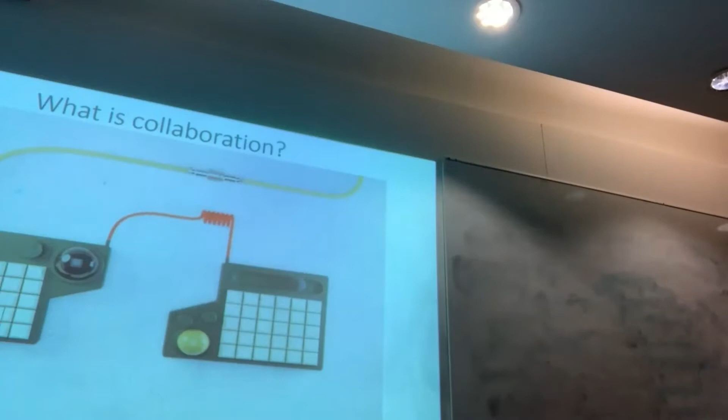It's a real pleasure to speak about collaboration. Today the topic is architects and engineers, or engineers and architects, collaborating together. Steve and I, I'm an architect, I'll introduce myself in a minute. We had collaborated for a period of 5 years, 20-ish years ago. It's not as long ago as it seems. In 20 years' time, this will seem like the shortest trip.

What we'd like to talk about today is the nature of collaboration today. I'm really interested in how collaboration has come to the forefront of working together. It is the mainstream. It is for your generation. You will know nothing but collaboration. Part of what we're going to discuss today, my little bit, is going to be what collaboration is not.

So this is my introduction. I'm a trained architect. I'm from the US. I was educated in New York, practiced in New York for 10 years before moving to Paris, practiced in Paris for 4 years before moving to the UK, where I have been living and working for 24 years. I had been working with very large practices up until the last 6 years, where I established my own practice with my partner, daab Design. We are a small practice, and we do works on small and large scale, micro to the macro.

My experience from 1984 to 2015 was with very large practices working on large infrastructure projects where collaboration was introduced to the profession at the time. So that's my share.

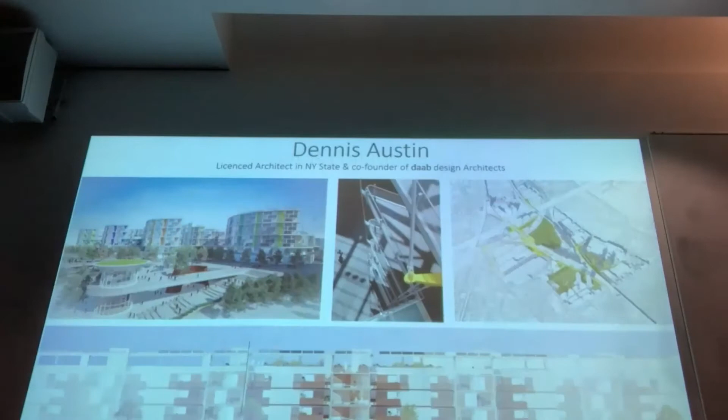For me to discuss what collaboration is, it's important to discuss what collaboration is not. A lot of buzzwords going around now. Collaboration is not just good coordination. Collaboration is not the traditional design team where there's an architect, a services engineer, structures engineer, sustainability, and a series of consultants. That's how projects have been structured for very long periods of time. Collaboration is not just, oh, we get along really well with our engineers, or the engineers saying those architects really aren't such jerks after all.

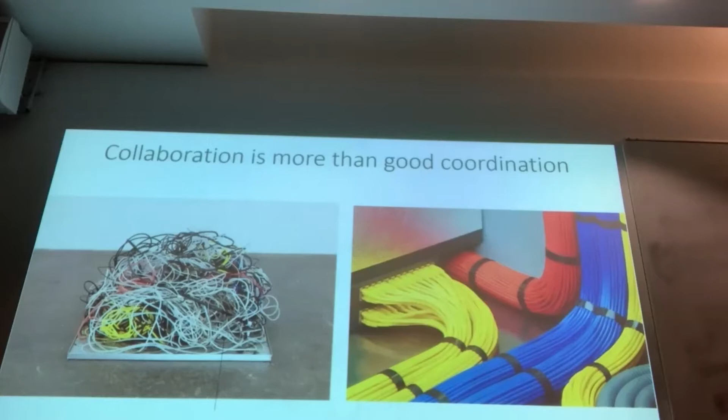Everyone had a task, and you sort of participated. You plugged in your task. You were never driven by the overall picture. You were never driven by what am I actually contributing. You were incredibly faithful to what you were delivering. You were faithful to the hierarchy of the project, of the office, of the structure.

And what happened, especially in the UK, so this is great because I'm not from the UK, I'm going to tell you about the UK history. What happened in the UK after the Second World War was a rethinking of industry. Some of it was just by sheer necessity: how to take a wartime industry and readapt it to post-war. It was also looking at how do we source raw materials, how do we upgrade our manufacturing infrastructure. It also looked at how do we begin to understand the needs of the customer.

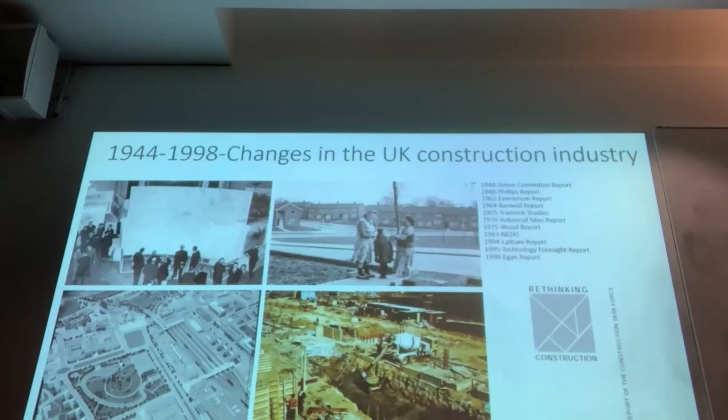1998 is when I joined Terminal 5. Steve joined a year or two later. Terminal 5, which we'll get to a bit later, is the epitome of this sort of Egan ethos. It's what has driven UK industry since. Crossrail, Jubilee Line Extension, Olympics, Vauxhall Nine Elms, Battersea Power Station. There's not a single project in the UK that has not been affected by this way of working, which is about collaboration.

So why do they collaborate? Why do I collaborate? I first want to talk for a moment about why I do this job at all, and that's because I really like making things. It is the feeling that you get when you see something that you have imagined with your collaborators and thought about and designed and analysed, and somebody builds that and it becomes real. That is almost the best feeling. And that is very much why I work in engineering design. It's not for the money or for the fame.

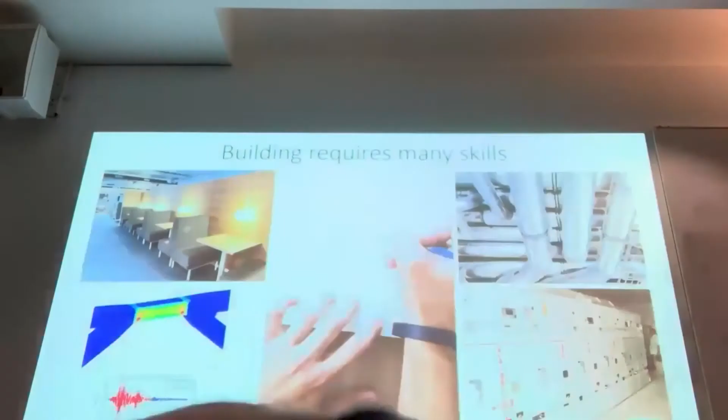And in order to do that, you have to collaborate. At the very basic level, like Dennis said, you have to collaborate because it is not possible for one person or even one artificial intelligence system to have all the knowledge and skill that's required to design all the multiple different facets of a building, its technical aspects, its human aspects, the beauty, the feeling of what a space is and what it can be. So you require a large number of people to do the job, but that is not enough on its own. Collaboration, as we talked about, requires much more than that.

It requires that the people involved can listen to each other and include each other. All the people with the right skills are working towards common goals, and they may well need patience with each other in order to understand and learn, and they need curiosity. A growth mindset is a thing that I learned about from schools quite recently, but I think that's a really important concept.

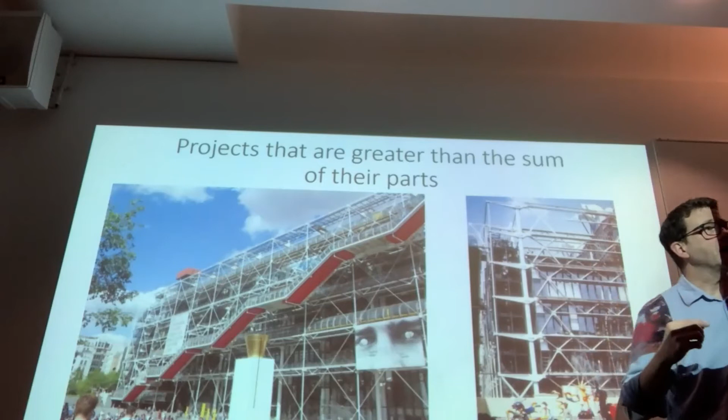And when I was trying to think of a building that epitomized that, I thought of a building in Beaubourg where the structure is a key part of the architecture, and the architecture is a key part of the structure, and the MEP systems and the vertical circulation are a key part of all of that. And it's a special solution that has come together from minds working together and thinking about every detail as well, from the most overall view of the building down to what the texture of the steel is when you walk up to it and touch it. It's a very special thing.

So this photograph, this is the Centre Pompidou in Paris, 1973 to 1977, is the epitome of collaboration. This is almost 20 years before the Egan report. What it is, it's mutual respect. It's services engineers sitting around, and back then, and even today on many projects, a services engineer, perhaps for the first time, hearing an architect saying, can you explain why the ducts need to be here? If they're coming from this mechanical room and they're branching out, can we organize them in a certain way?

And the services engineer would say, why don't you have a ceiling? No, we don't have a ceiling, we'd like to see that. Why do you want to see it? Because we think there's something. And what happens is, it becomes this thread that you pull. You're showing a level of curiosity for the non-services engineer, so for the architect. And the services engineer is saying, great, it's the first time someone's really interested in what I do. This building epitomizes that, and that's the beginning of collaboration.

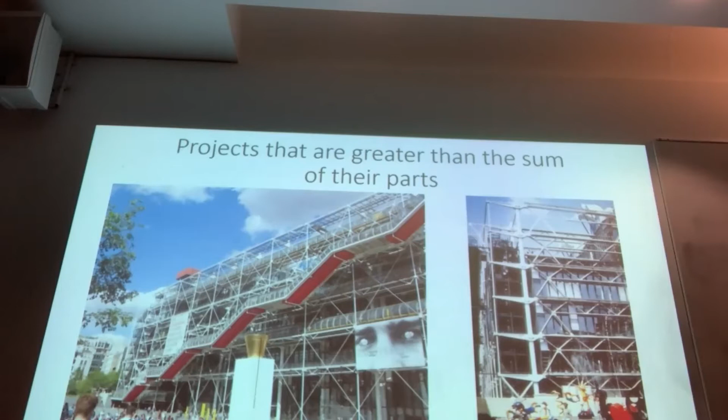Yes, and I've sort of put my tongue slightly in cheek when I said that what you can create at the end of it is a part of the legacy of humankind. And I think Terminal 5 that we worked on does come to that. I also think that the house I live in at the moment, where I'm repairing it, counts as part of the legacy of humankind as well, because it's been there for years, and I'm going to pass it on to the next people. But I count my work, our work, as something that is for the future.

Yeah. And what's happening at this meeting is a discussion where the engineer is putting the architect to task. If this is what we really want to do, we're going to have to do the following. And then the architect said, well, if we have to do the following, can't we understand how this might be expressed? That's an interesting idea. If we express that, then the load path is changed. However, what you've suggested is an improvement to the load path, by the way. And it is a fluid, open discussion. And what it then does is it begins to set a mindset.

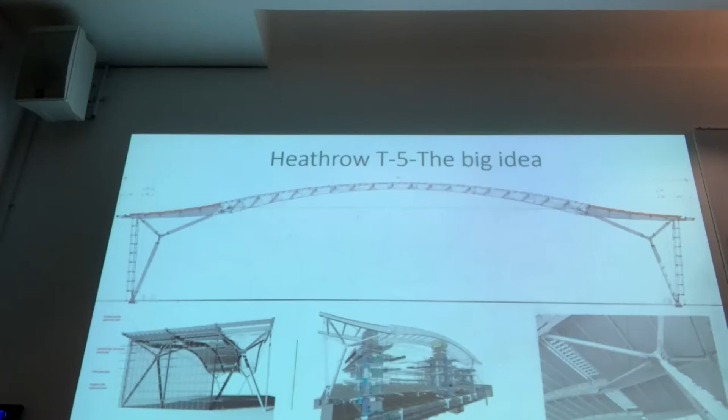And I really liked this company because they were doing everything in 3D, but they were building hand models to see if you could actually lift the bit out of the sand after this casting. So what happened with this design was no one used the word collaboration back then. And if people did, we probably would have been skeptical and thought it's just a managerial bit.

But what it led to, in what we see and feel and touch when we walk through the building today, is, I feel, a product that just benefited from everyone's involvement. And these images, the top row, are the development of what we call the foot, which was comprised of 1, 2, 3, 4 structural steel castings and a whole bunch of machined elements. And it was all about how it was going to look, how it was going to function structurally, how it would withstand movement, building tolerances, direction.

And this image here, and an image that we'll see a little bit later, is in the office out at Heathrow, where there were 325 people working anywhere from 1998 to 2002, and then we broke and went into all the Portakabins on site. We were building models of everything, and the structural engineers were really getting into the model. We wanted the model to understand what it felt like, the geometry, how space would be perceived.

The building managers said these models are a fire hazard, take them down, get rid of them. And some of the upper tier management at Heathrow was saying, you guys are playing with plasticine. Is that what we're paying you for? Just get this crap out. Until the steel supplier and his crane operators said, actually, we need these models.

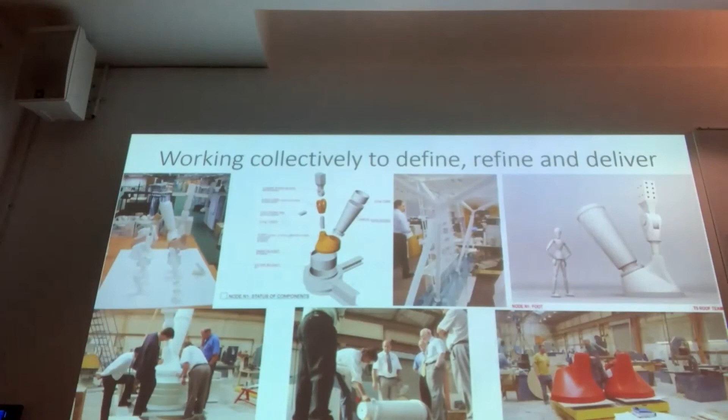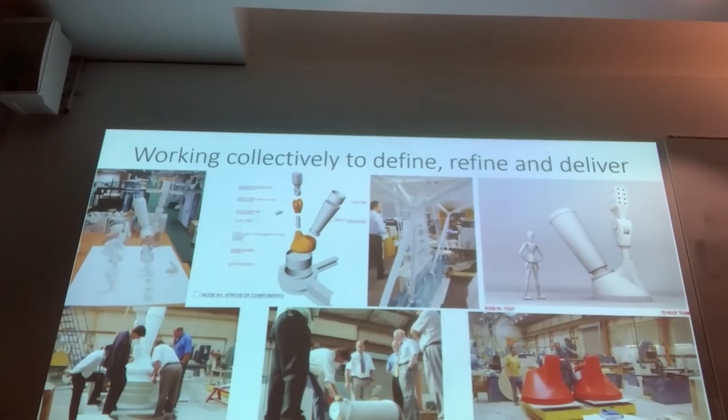And again, the geometry of all that was influenced by the casting foundry people looking at early models and early geometries and saying, we can't cast that, or there's going to be a great big line around here where we're going to have to break the mold. And I can tell you that line will be there forever. So, oh, don't you just grind it out? No, you don't grind it out because you're going to have a difference between the cast surface and the ground surface. It was a truly collaborative environment where every aspect of what we were doing became relevant.

Very quickly on this photograph, this is up in Thirsk, where there was a practice. The crane operators and the steel erectors were practicing how they moved and lifted pieces, and was it erectable?

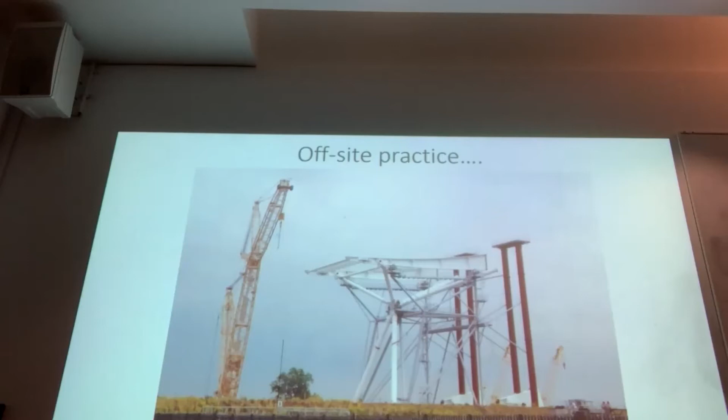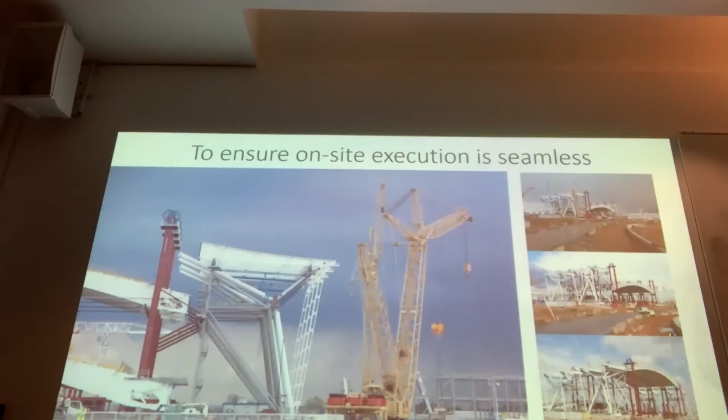Came down the site, and that whole erection method of lifting the roof first and building a building inside a building, which could be a whole nother lecture, was all about a collaborative buy-in to a single idea, scale, and inclusion. So we've got some of the crane operators on the lower right, sense of scale in the image on the upper right, and the environment in which we worked.

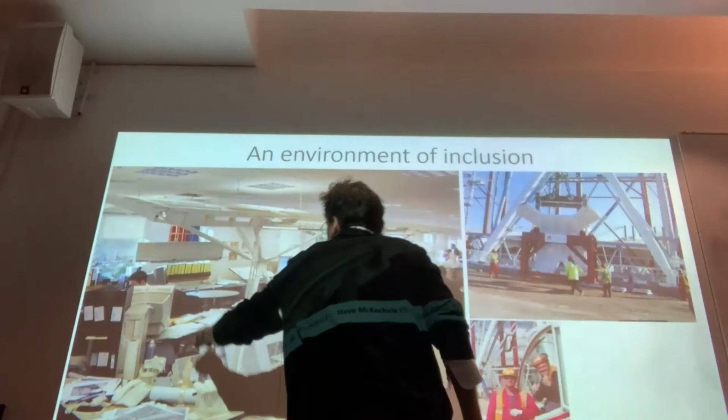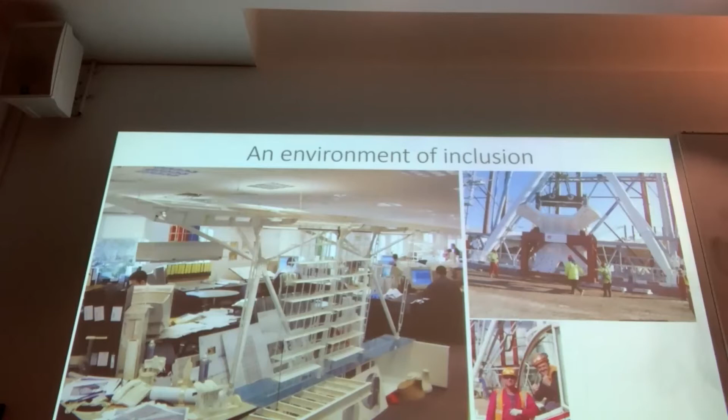And Steve's desk was right here. And these are engineers from Arup. I was here with our team, and we had a completely integrated design team. Didn't matter what company you were from, didn't matter who your boss was, it was all about working in the same spirit of project. And the use of models and scale and practicing.

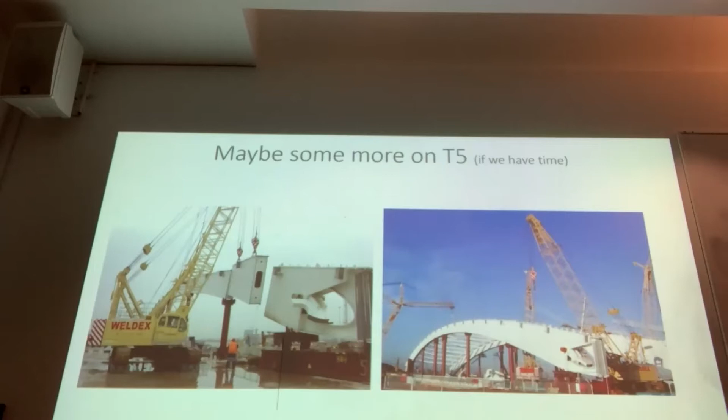So do we want to... we've done 20 minutes or something? Should we dash on to the next? Let's go on to more, and then we can come back should you need to.

Those were going to be some slides about some more details of Terminal 5 and how the details included the needs of all the different parties in a collaborative way. But this is another collaboration story, which is a bit more recent. Number 8 Bishopsgate. You can see it there outlined in red. When we joined the project, the architects, Wilkinson Eyre, had done a competition entry, and all these images came from their competition entry to the client as their design references.

I wonder if you do that today. I don't know. That was 2013. You still do that, yeah.

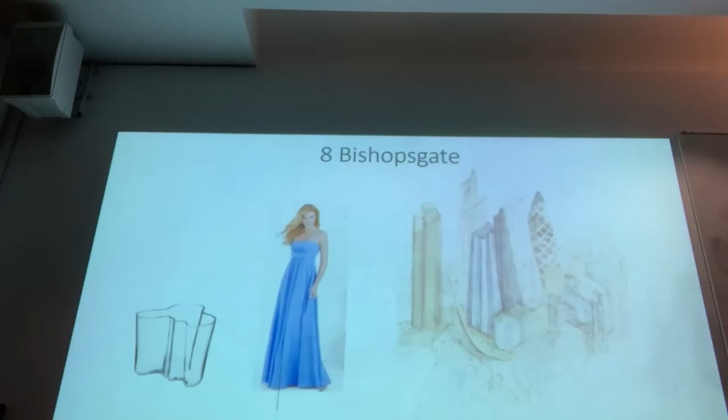And that's a watercolor by Chris Wilkinson, who just died at Christmas. And this next page is one of his sketches. He sketched that on my iPad when we were talking about the bracing and the building. Right. Pretty clear.

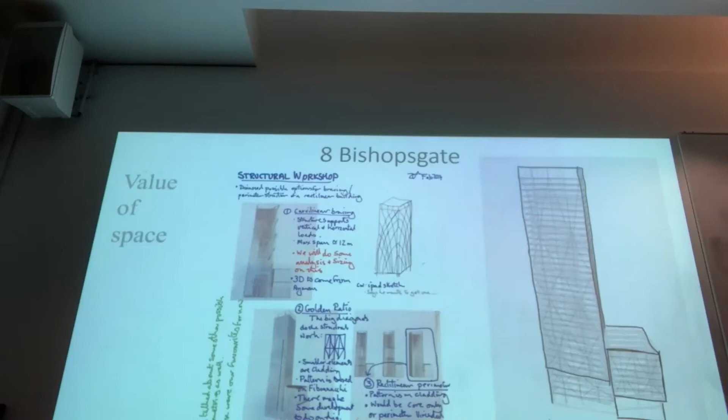So it became clear quite quickly that in order to make space for the city that was lettable and had a good value to the client, right? They could let it for a lot of money. It needed to be in rectilinear shapes because that's what the market wanted to rent. So we had to change our minds from that swoopy shape to a rectangular kind of geometry, rectilinear kind of geometries.

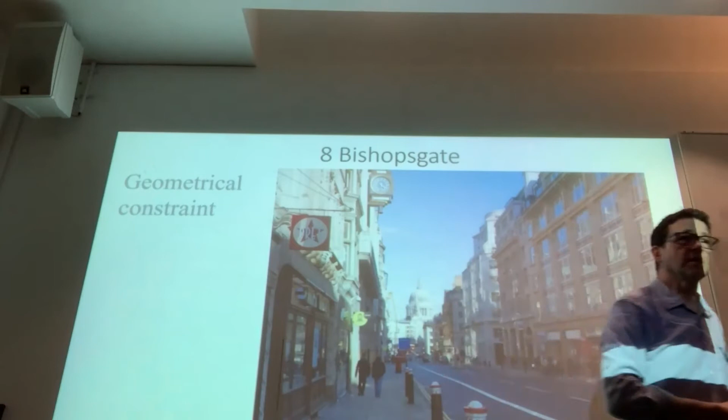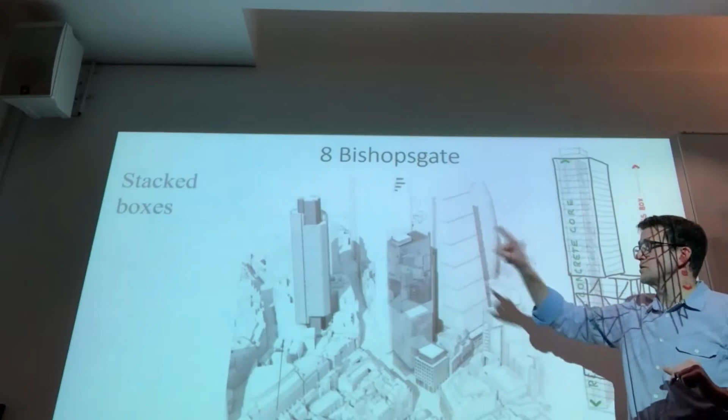There is also a key constraint on that site, which is the view of St Paul's down Fleet Street. In the distance there, you see the outline of 122 Leadenhall Street, which was already built by then. We couldn't extend beyond there. So this geometry here of stacked rectilinear boxes responds to that geometry behind it by tucking itself into the same piece of sky, right?

We also knew, I should have some. Yeah, right. You had a wind movement animation?

Oh, that's right. Yeah. No, well, look, we wanted to use bracing on the perimeter because it is much stiffer and stronger than putting your stability system in the central core of a building. With this building, we were able to reduce the thickness of the core walls from 550 thick without this perimeter bracing down to 300 thick, which is a big saving in concrete volume and in embodied carbon. So we really wanted to do that.

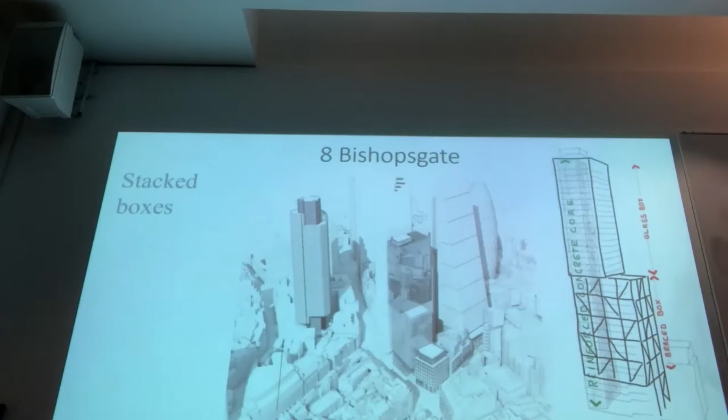We wanted to use this bracing system in the perimeter, and we were talking about that with Chris and with the other architects at Wilkinson Eyre, Oliver Tyler, who you might have met, who is occasionally here, and Eamon Toner. So we wanted to use that system, but the client and the architects didn't want something that looked like it had a truss on the outside of the building. So we tried to do a bit of optimization.

The number of possible arrangements of braces in the building is enormously large, a really huge number. You don't need braces in every bay in this building. You only need a few. But which few do you need? Because the number of those arrangements was so big, we decided to generate them at random and to test them for how good they were in terms of the building stiffness and the forces in the braces and whether it was going to overload the rest of the structure. So we tested 21,000 options and chose the most favourable one.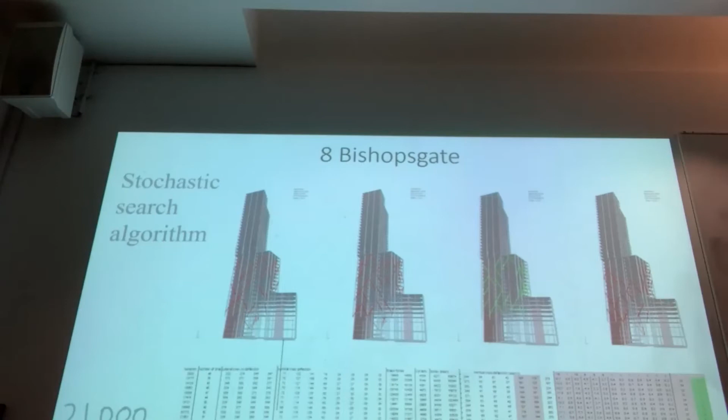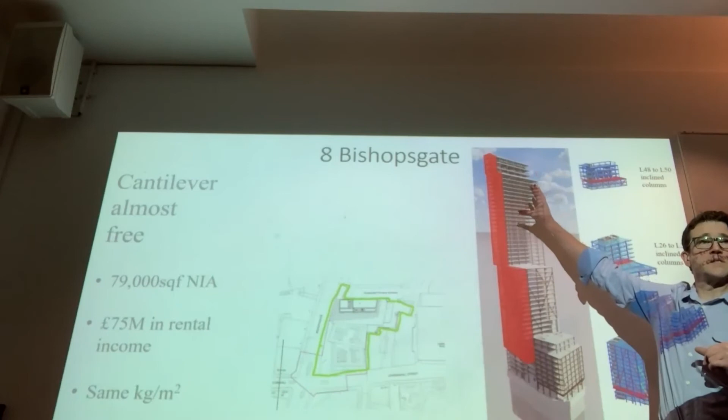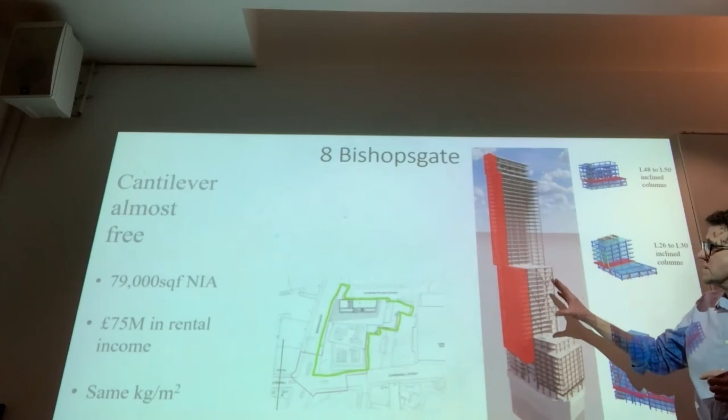Having done that, we had a braced section at the bottom of the building, and then that slender core carries on up and has a nice slender open section at the top, which has very clear views out. But the client wanted more area. The more area you can put on the site, the more rent you can charge, the more successful the building is commercially. So we needed to find more area.

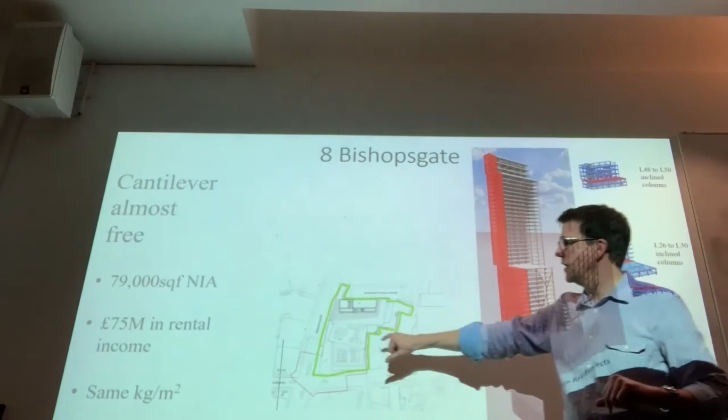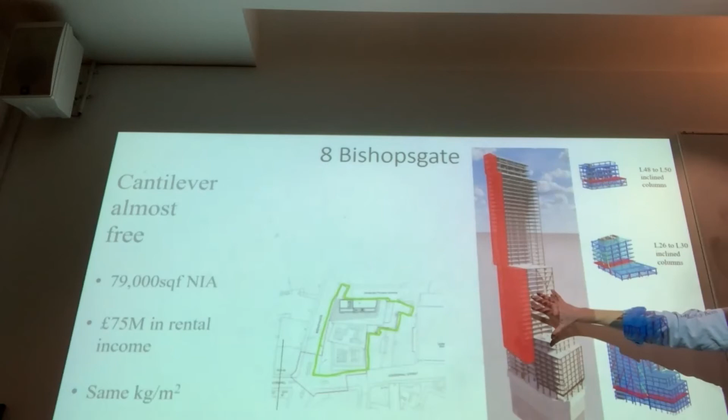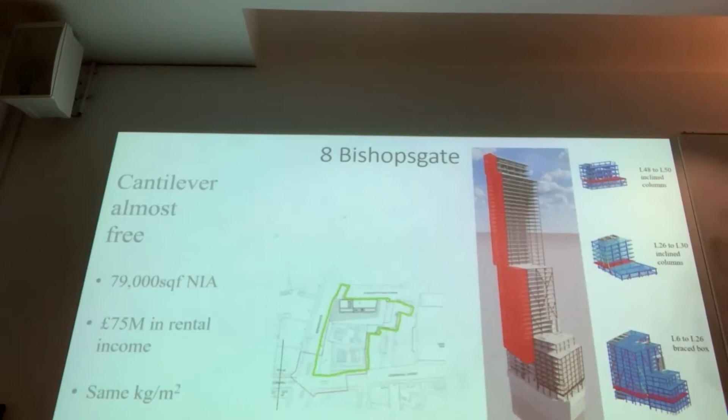We knew that the client owned the space, the pavement, and also part of the road, even though it's public highway. It was owned by the client. So we suggested that this braced section of the building could cantilever out over the road without really adding any extra steel. So we increased the floor area, 75 million in rental income increase from that increase in floor.

Also later on, and this was a sort of quirk of the planning process. We discovered, this is in 2018, the planning had gone in a year or two before and had been given planning permission, but the thing had been quiet. There was a building on the other side of the road that got planning permission and was slightly higher. But the planners had made us put this observatory at the top of the building. There was a viewing deck. And the building on the other side of the road was right in front of it.

So WilkinsonEyre pointed out to the client and then to the planners that, look, you wanted this observatory, so you're going to have to allow us to go a bit higher. So we had to put an extra 13 stories on the building, which again increased the rental value by 120 million, and the project started going at that point. And so that brought value to the client, and it brought value to us.

Did the additional 13 floors have any significant consequence to the frame below? Yes, it increases all the sizes and so on, but the cost per metre squared of the building overall actually reduced. 2016, yeah, 2016, we must have got the permission. 2018.

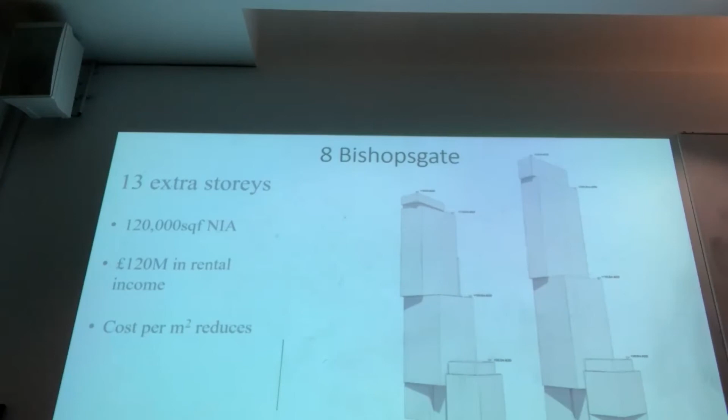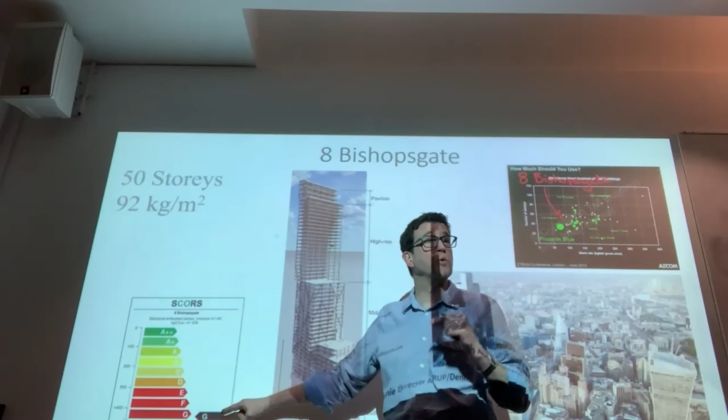So overall, we were quite proud of our performance in terms of steel quantity in the building, which is what we were thinking of a few years ago. We managed to beat most of this graph of steel quantities in buildings. It looks a little bit lackluster when you compare it against the SCORS rating. The SCORS rating that we would be trying for now, we'd be aiming to be up here now, but for the time that was good.

And I put that on the slide there because we are now calculating an embodied carbon value for every building we do, even if we feel slightly embarrassed about it, because that's a learning thing. And the next time we're going to beat it, it's going to go down, down, and down. And everybody's talking about that.

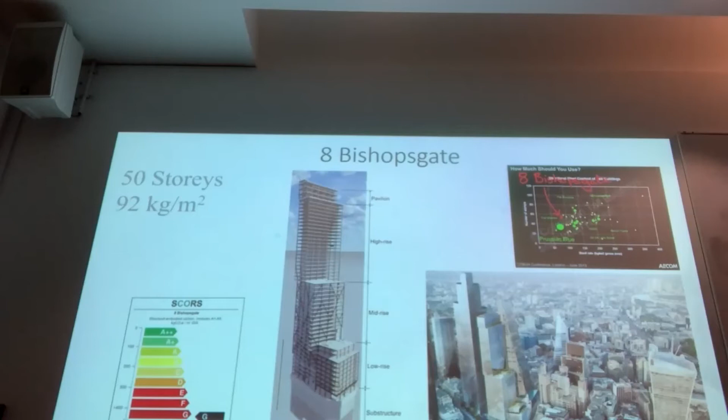This was a special project because it achieved planning, because it attracts tenants and it was buildable, and it's achieved a really good energy in use rating, 40% better than building regs. The embodied carbon is good for its time, and we as a collaborative design team working together were able to gain the area, enhance that rental value, and make the project go ahead.

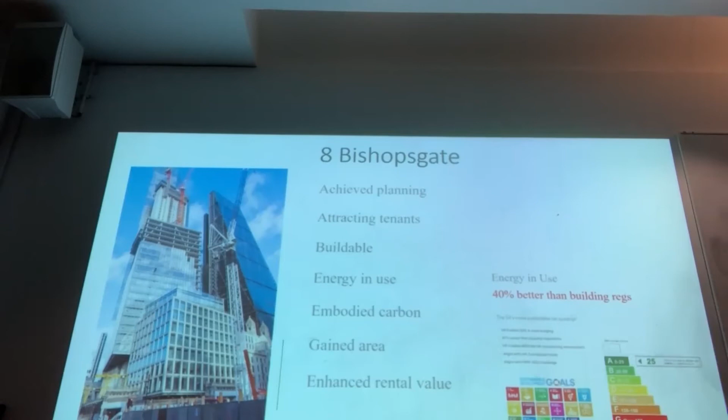Geneva Airport East Wing is a project I ran for Rogers Stirk Harbour + Partners from 2010, when we had the competition in Geneva, Switzerland, until 2015. It just opened just before Christmas, 14th of December. I use this as an example of collaboration in a cultural context. That slide I had up earlier, between 1994 to 1998, and the introspective analysis of the construction industry in the UK to better itself.

What's interesting is when you work outside of the UK, you begin to understand that there are, it sounds completely idiotic, but there are obvious cultural differences, and there should be obvious cultural differences, because this is not an amalgamation of cultures. Each culture should work on its own.

Very, very quickly, the Geneva East Pier is a 520 meter long, 2-story passenger facility for the Geneva Airport. Except for immigration outbound and inbound, there's no baggage handling processing. It's a very process-light building. It has incredible complexities of the site, where there is an adjacent exhibition hall where they hold the watch show, the annual automobile show, and the annual chocolate show. Those three shows bring an enormous amount of revenue and are important cultural events if you're Swiss.

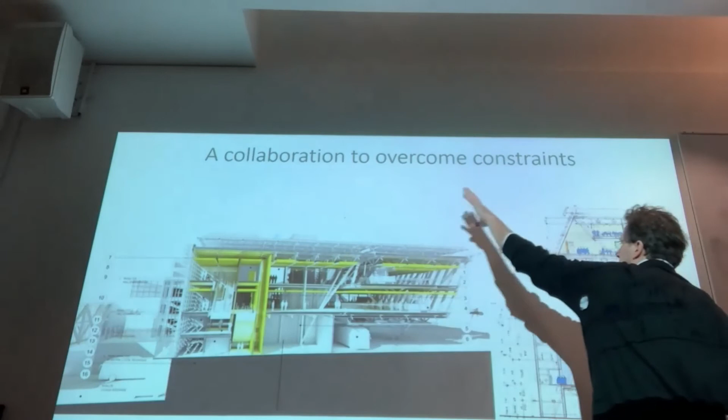What was really interesting, the scheme that we put together that won the competition and was eventually built leaned. It leaned away from the adjacent exhibition hall, which ran for about 300 meters, right here, and it leaned towards the aircraft, removing glare from the facade for the pilots who are negotiating the airport, taking off, landing, taxiing.

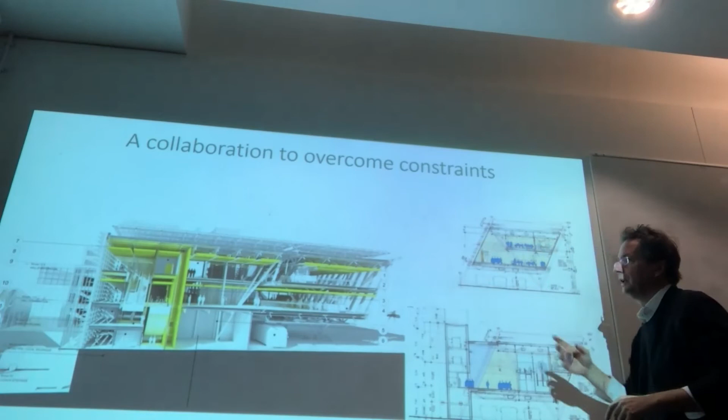Structurally, a really interesting building. The entire exoskeleton is exposed. There's a major diagonal, so there are diagonals crisscrossing every 80 meters along the 520 meter length. It's a big, long extrusion, where you get different conditions where there's either an arrivals corridor, or an arrivals corridor and processing, or at some point there's an entire floor. This is at the annex where it makes the appendage to the existing building, so there's a whole immigration process.

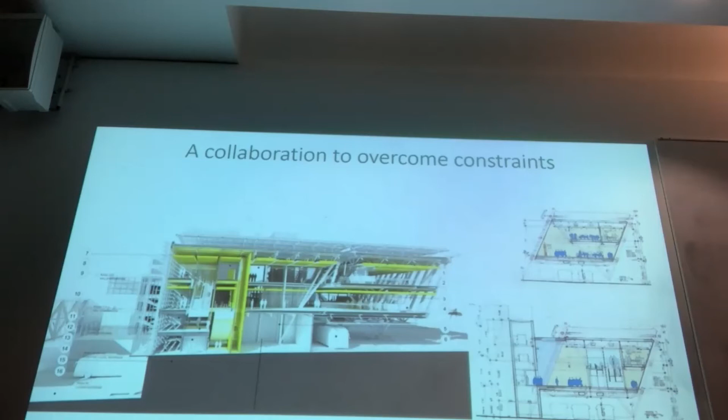The cultural differences, what I talk about, is Geneva is part of the Swiss Romand. It is the French-speaking portion of Switzerland. Obviously, our consortium was made up of a huge multidisciplinary Parisian-based engineering firm called Ingérop, RSHP, a local architect, and Ingérop had employed local structural engineers and services engineers.

What was really interesting with this project is you step into a minefield of French-speaking Swiss getting irritated by French-speaking French, and I'm a French-speaking American, sort of having to be the translator for the group. But more importantly, because I had worked in France, I knew that whereas almost all of my colleagues at RSHP did not understand, nor did they have an appetite for, nor could they tolerate the fact that French engineers traditionally don't have a culture of collaboration.

There's very much a... French architects are the cliche of the artist doing the sketch, walking away, and then receiving the drawings from the engineers, freaking out, telling them it's a bunch of shit and you are useless, go back and do it. The engineers go back in their office, say what complete wankers these guys are. And they come back, they fix it a little bit. Everything is about fighting, and trying to get a sort of compromise somewhere.

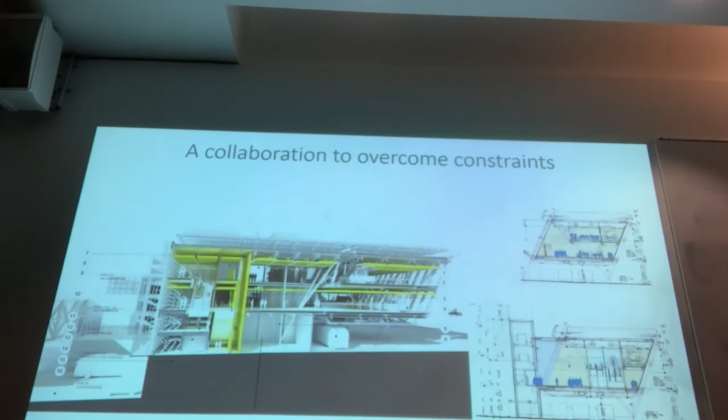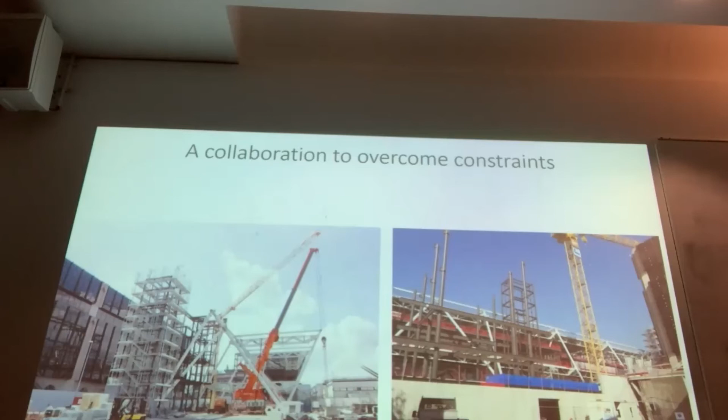The end product of this was, I think, a pretty successful building. But I almost fault it for that process of not listening and not willfully accepting engagement.

How are we doing for time?

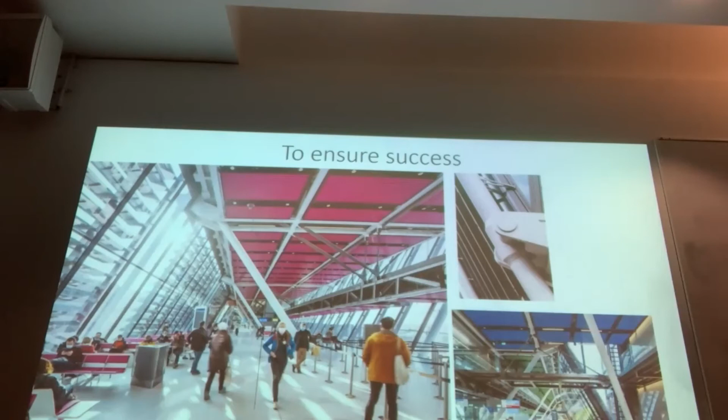What this segues into is that collaboration is about communication. It's about graphic communication. It's about ditching the process where architects draw for 4 weeks, 2 months, send dossiers to the engineer, they take 2 months, and then send the dossier back, and then it's about working together in the same room.

Steve and I would do sketches and I'd roll my desk chair over and say, Steve, what do you think about that? It's not going to be wide enough. How much wider, Steve? A little bit. And I'd go back, what do you think about this? Well, that can work really well. What if we do the following? So this whole idea is you circumvent this sort of pass the parcel approach.

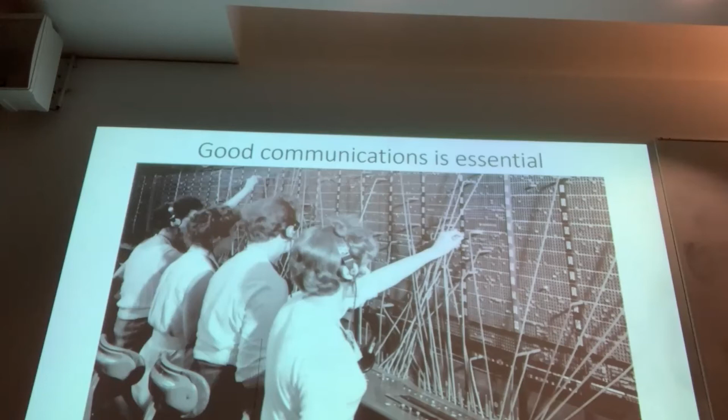But most importantly, I think I became a better architect by working with an engineer who became a better engineer, because we were for the first time seeing live and in real time, which we didn't use back then, this idea of how people react to an idea. So it's about communication. It's about everyone's buy-in. And that's what's really interesting.

Your generation, let's see that slide Steve had with all the words. On big projects, it used to be sort of the manager would come in and do these presentations. And there'd be that dreaded day of post-its. Post-its on the wall, where everyone's writing what's your dream.

But now it's embedded in every project, not the post-its hopefully, but the idea of this communal buy-in, and it's not bullshit. It is how projects are going. It's getting up until the procurement right now. Procurement has changed drastically. These big projects are all about looking at the design team and understanding all the sizes, scales, colors, cultural makeups of the teams. This is no longer about one big conglomerate saying, here we go, we're going to provide a team.